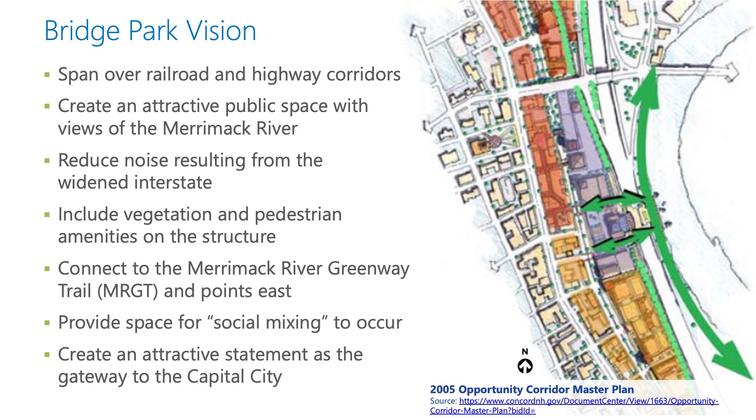Create an attractive statement as the gateway to the capital city. Whatever we do here would be visible. You've got, whatever it is, 100,000 vehicles going through here on a weekend, and all of a sudden they're going to look up and see something interesting instead of just the highway.

We considered opportunities, enhancing the visual connectivity to the river from the downtown side. This is actually an image from the Opportunity Corridor Master Plan from way back. It showed high-end development on the city side, a span over the railroad and the highway. This one didn't go across the river, it landed on the bank of the river, but similar kind of an idea.

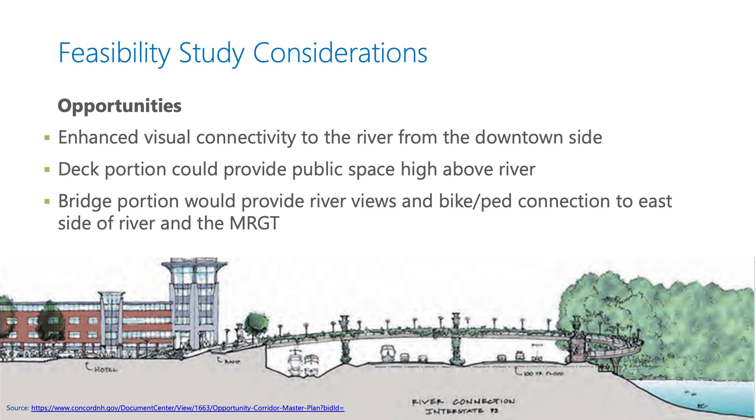Another opportunity is to provide space on the deck high above the river that would give views out onto the river. And then the bridge portion would provide river views and a bike ped connection between one side and the other.

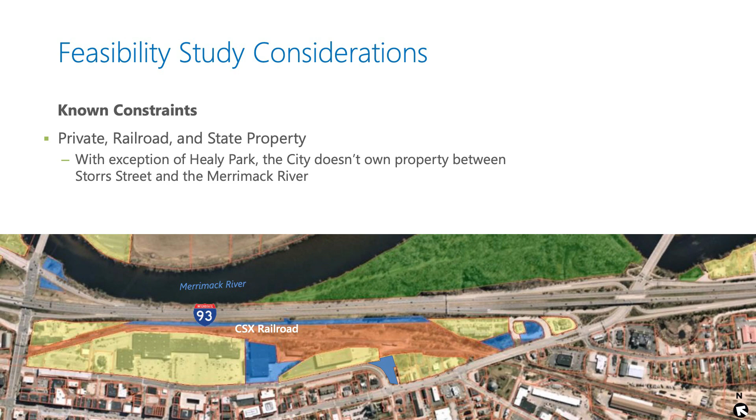The green over here is city property, the park. But so early on in the process, we met with property owners, the primary property owners, and we were, I'd say, afraid at the beginning on how we would be received. Surprisingly, it was a warm welcome. The property owners saw this as an opportunity to bring maybe some more life to their businesses. Some of them actually have redevelopment plans that this could fit in nicely with. So we went into it kind of skeptical, and we came out with a lot of hope.

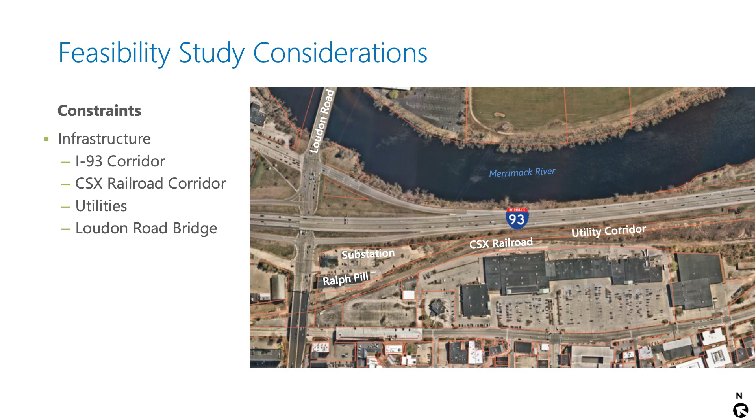There's also physical constraints, infrastructure constraints. You have the existing and the proposed I-93 that you have to get over, the CSX railroad corridor. There are some utility lines, high power utility lines that unfortunately are right at the elevation that we're going to be coming over the highway at, so we have to deal with that. And then there's also the Loudon Road Bridge, which is actually kind of an amenity.

So some of the other considerations were access. We want it to be convenient. If we just build something that people can't get to, it's not really worth it, right? So we want it to also be attractive so they will come out there. We want the connectivity, the MRGT, as we mentioned.

At the last meeting, there was a lot of discussion about what kind of amenities would go on the structure and the deck park. Everything from food vendors to a butterfly museum to, there was all kinds of ideas on what could go out there. We didn't get deep into that. We're just looking at providing a space that eventually could be programmed.

There was concern about security. Some of these structures are quite long, and people want to be able to feel safe if they're going to venture out there. So there has to be good lighting, there has to be a lot of use. The more people out there, the safer you feel, and probably security systems.

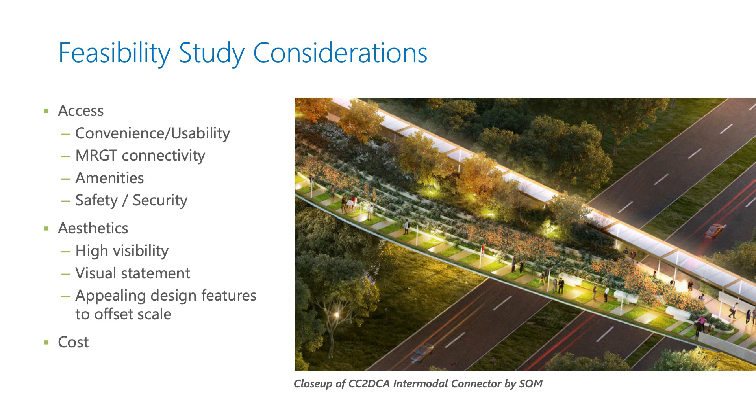Aesthetics was a high consideration. It's going to be so visible to the people in the city as well as all these people passing through. A rudimentary bridge wasn't going to cut it, so that's why we have this architect on board. We want to make a statement. And of course, cost is a huge consideration.

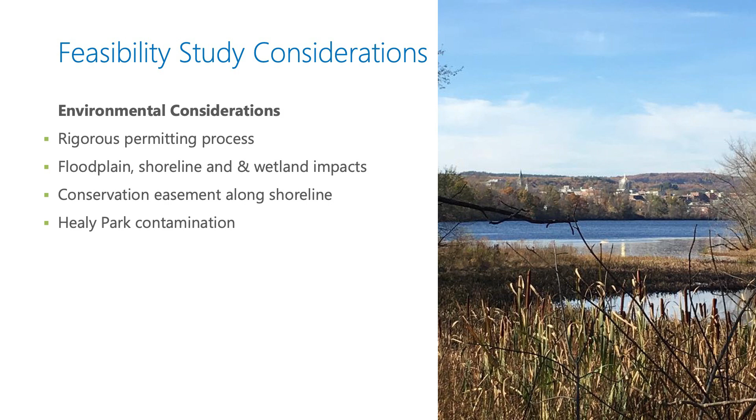There's also environmental considerations. It would definitely take a rigorous permitting process, doing work in the river. We cannot span the whole river, there's going to have to be piers in the river. The permitting for that alone would be interesting.

There's conservation easements on the east side of the river. The first 100 feet of land when you go ashore is protected. And then Healy Park, if we were to use Healy Park at all, there's concerns with some of the existing contamination there.

So, physical considerations. This is an image of a cross section starting at Main Street, and this is the plan view down here. That yellow line is where we cut the cross section through this whole area.

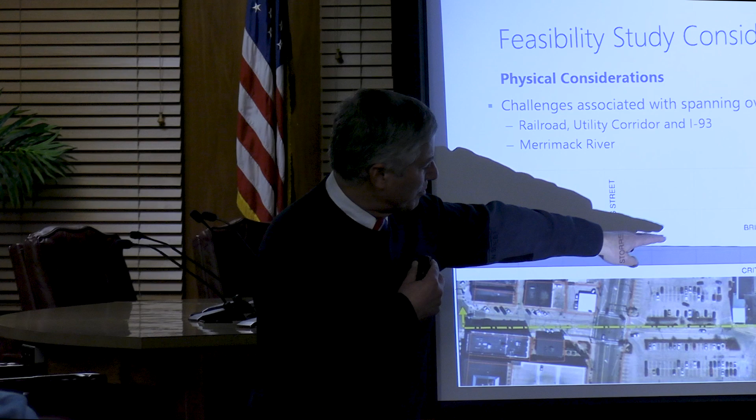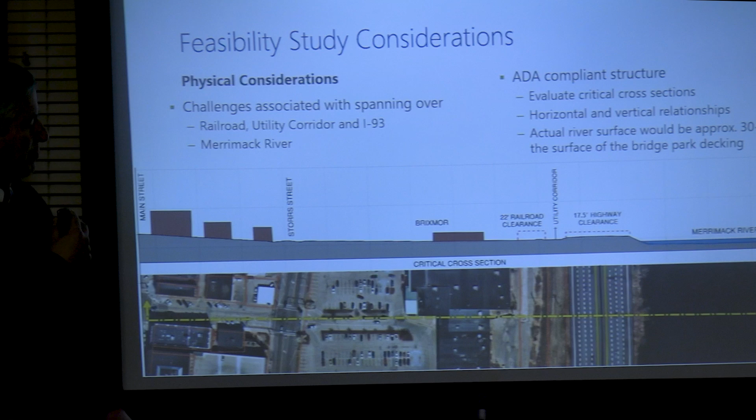So starting at Main Street, you're kind of high. You come down to Storrs Street, and you've got the Brixmor development, the plaza. You need to be 22 feet over the railroad with any structure. You get that utility line right there, and then you have to be 17 and a half feet over the highway. And then you need to get over across the river. So there's a lot of height differential here.

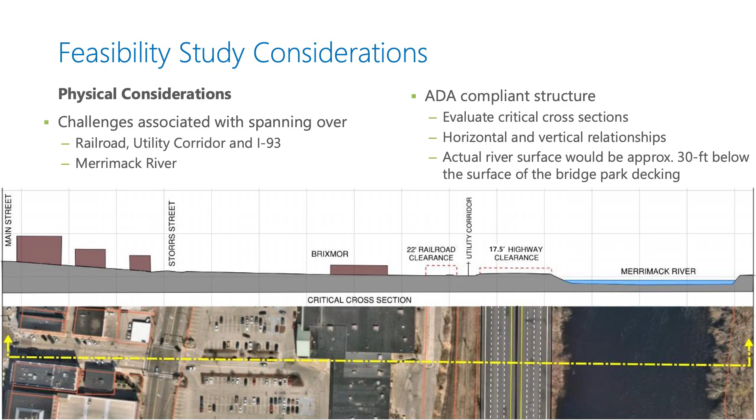If you're out here over the highway, you're actually going to have a great view because you're going to be very high, but you're not going to get down to the river.

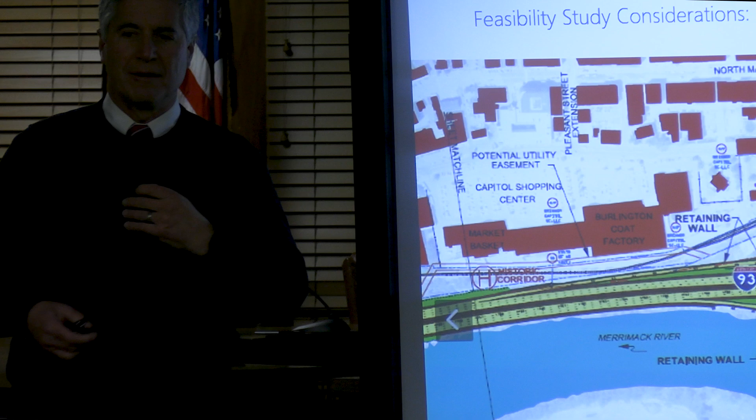I just put this up. This is one of the latest images of the 93 corridor improvements. We're looking at coming from Storrs somewhere across the highway. And we spent a fair amount of time evaluating different locations to cross, looking at elevation, looking at property ownership, looking at trying to keep it as short as possible for cost. And then Steph can talk about the alternatives.

Okay, so we considered 3 different alternatives. The first alternative is a multi-use bridge spanning over the railroad, I-93, and the river. And we had 2 sub-alternatives as part of that effort, looking at 2 different alignments.

The second alternative was taking one of those bridge alignments and then considering adding a deck park connected to it. And then the third alternative was looking at essentially depressing a section of I-93 and building an expansive park over the top of it.

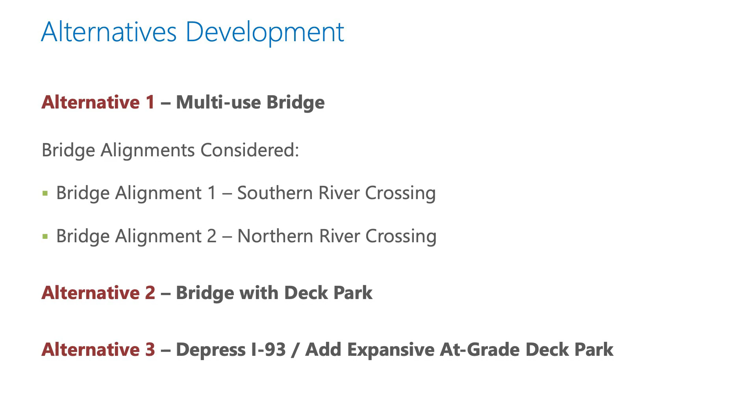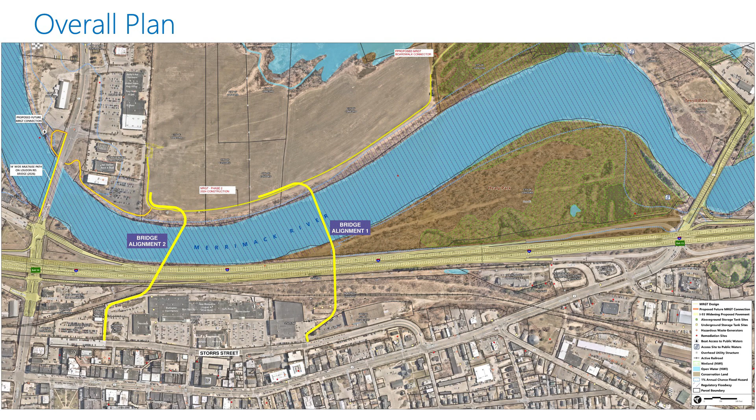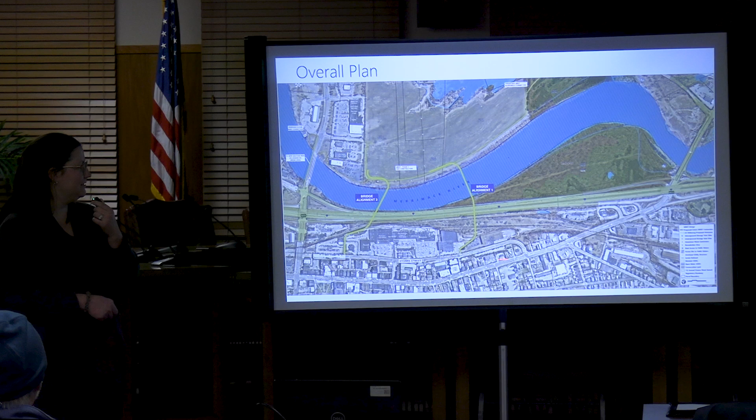This is an overall plan looking at the entire study area, which initially was the area between exit 13 to the south and exit 14 to the north. Ultimately, we concentrated our efforts in this area closer to the northern end, because there were better opportunities for connectivity to downtown through there, and because the river crossing was physically shorter, which would cut down on cost.

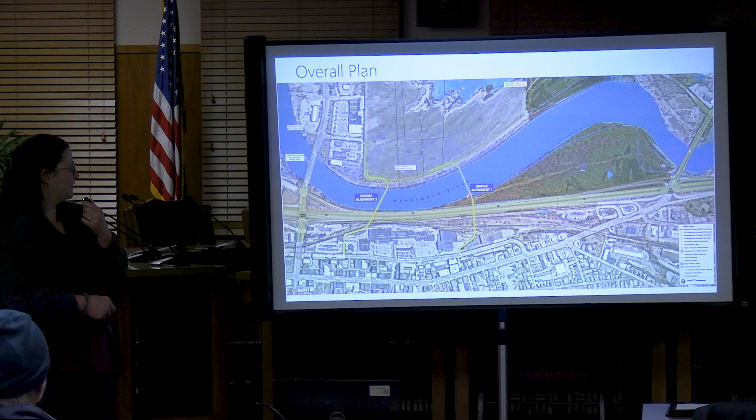Actually, if I go to the next slide, I can zoom in. So alignment 1 to the south starts here on Storrs Street. We chose this location because it connects to Theater Street, and that allows a connection to Main Street downtown. And we're south of the Brixmor Plaza. Essentially, this block of retail buildings prevents us from having anything in this area. It's just not feasible to assume that building will be going away anytime soon.

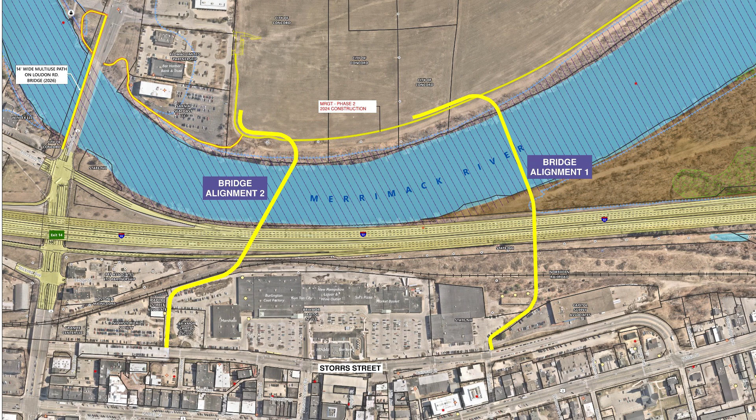Alternative 2, or alignment 2, is to the north of the plaza. It lines up with Dubois Ave, which also—it's hard to see on the graphic—there's a public alley here, which would be the connection to Main Street and downtown. This graphic also shows the connectivity to the MRGT, Merrimack River Greenway Trail right here, which is recently under construction, and it connects further to the south this direction.

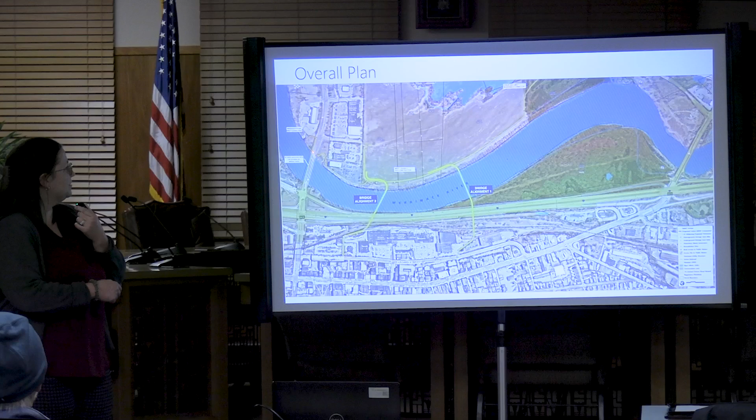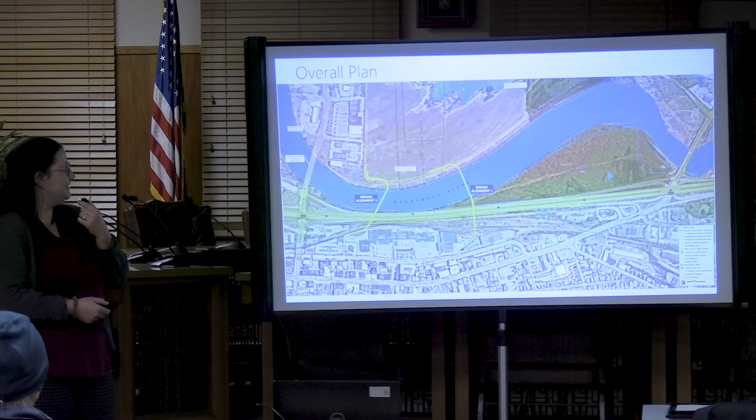Actually, if I go back, you can see the yellow line here, and this is a proposed future boardwalk connection as well that will tie in. And then to the north, this is also—Greg, correct me if I'm wrong—a future phase of the MRGT, which will connect to the planned 14-foot wide multi-use path going alongside Loudon Road. So there's a lot of connectivity in this area, a lot of options for bike and pedestrian access.

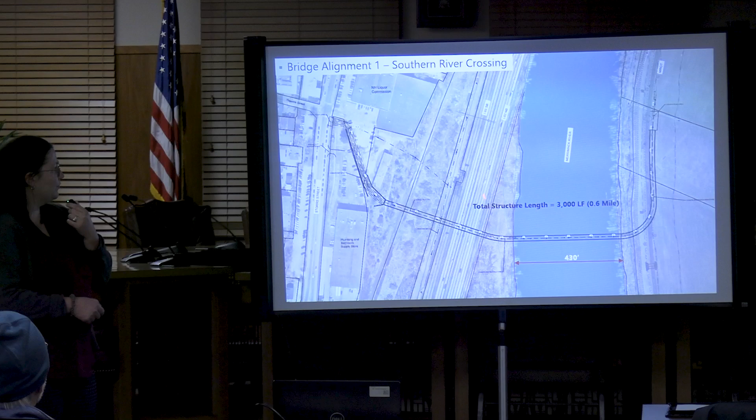Getting back to the alignments. So zooming into alignment 1, this is the one that's south of the Brixmor Plaza. The total structure length is 3,000 feet, which is just over half a mile. It's fairly long, and the river crossing alone is 430 feet.

So we turned this alignment down to the south a bit before crossing over the tracks, the highway, and the river for a number of reasons. One of which being we wanted to minimize impacts to the operations of these properties, their parking, circulation, and access. This alternative allows us to place the path in a grass strip with minimal impacts to parking. There are impacts to the driveway entrance here, but we're able to propose a revised entrance further to the south that will mitigate that.

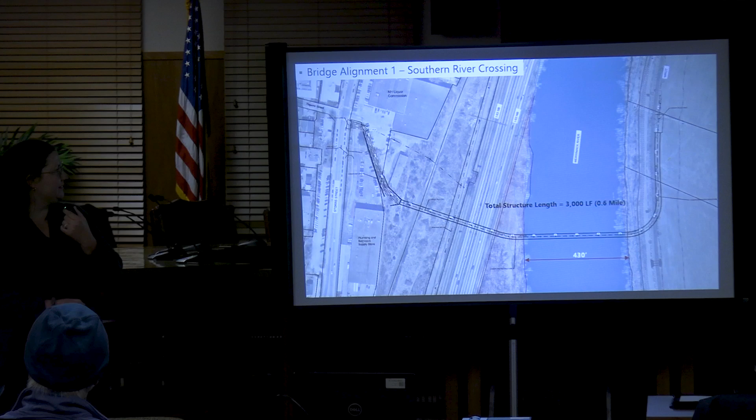Another reason—if you can see these dashed lines here and these circles, it's a little hard to see—these are existing utility poles with overhead wires. We're trying to minimize conflicts with those as much as possible. There is a line, poles, and wires running here that ultimately will have to be impacted by the project, either de-energized or placed underground. That would be evaluated if the project were to move forward.

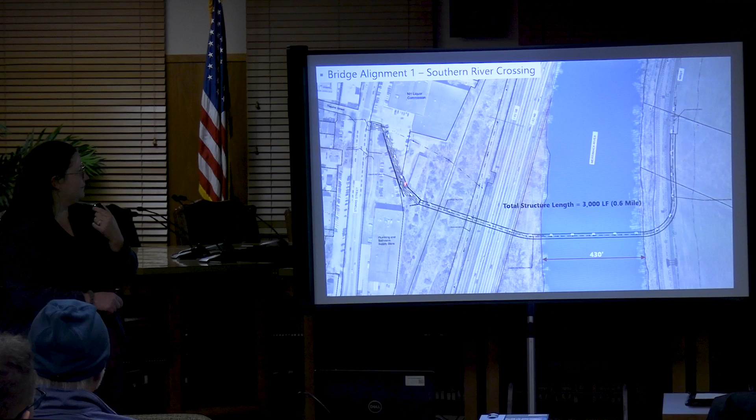And another reason is to avoid impacts to this existing building here. And then lastly, and probably most importantly, we needed enough space to ramp up to get over the different features—this is the railroad corridor, I-93, and then the river.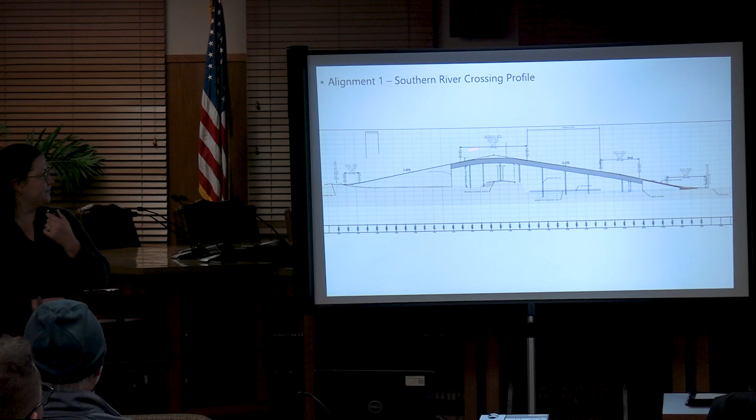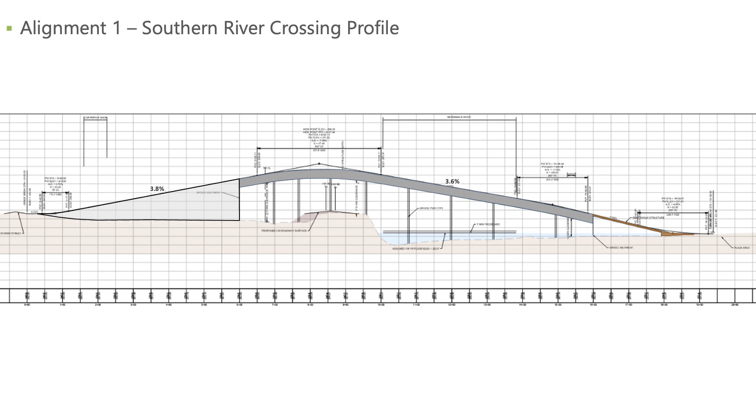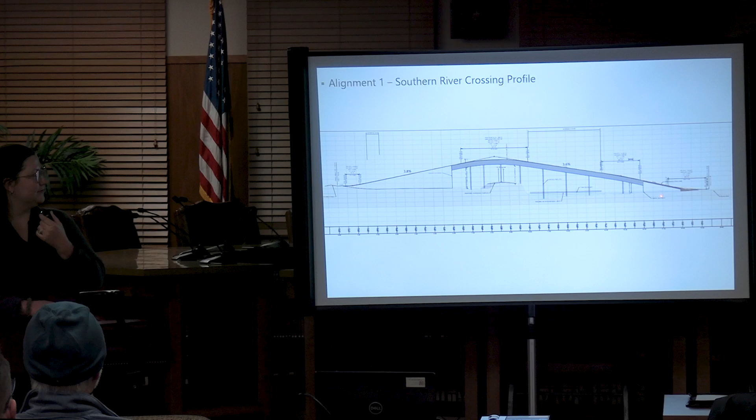The different colors on this graphic represent different structures. The light gray represents areas of fill material with some retaining walls. The dark gray represents a bridge structure with piers placed every few hundred feet or so. And the brown represents a boardwalk structure on piles. We're proposing boardwalk because this area on the eastern bank of the river is subject to flooding, and we want as limited fill in the floodplain as possible.

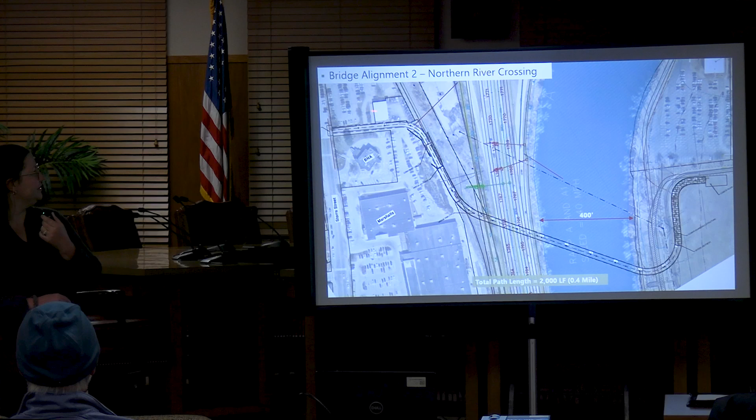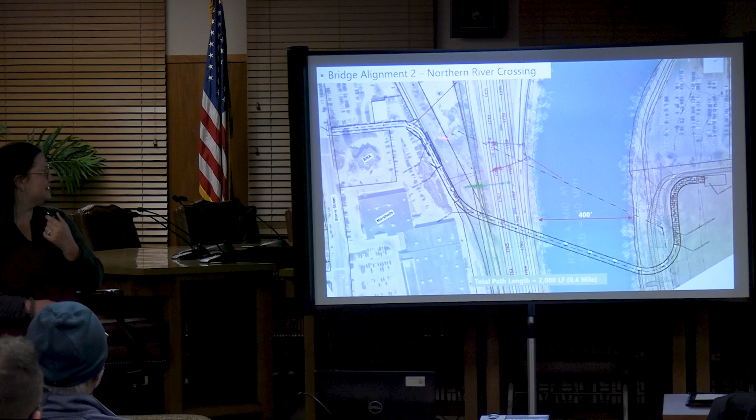Moving along, taking a closer look at alignment 2, this is just north of the Brixmor Plaza. We start just to the north of, I believe, the Bank of America building. We're utilizing a current access drive, but looking at the circulation through these properties, we think it wouldn't too negatively impact their operations. They could have new access points and work around this. If we move forward with this, there'd obviously have to be a lot of coordination with them, but it seemed like the least impactful option to operations.

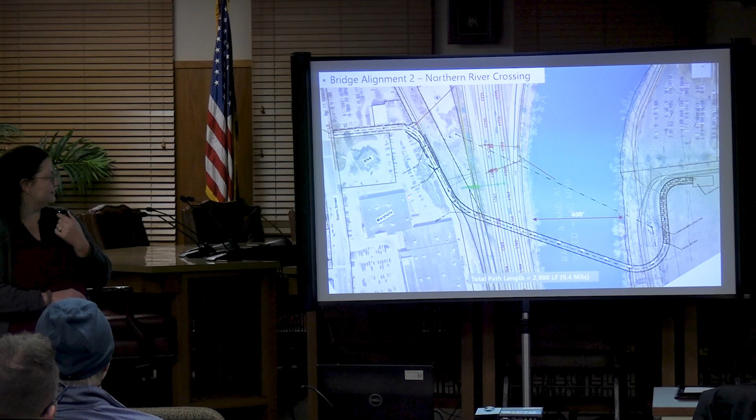And then we skirt around and hug the property line with the railroad. Again, it's impacting an access drive here, but we feel there are plenty of other options for vehicles to circulate this property. We did peel away before we got behind the building because we wanted to maintain access back here to the loading docks and for emergency vehicles.

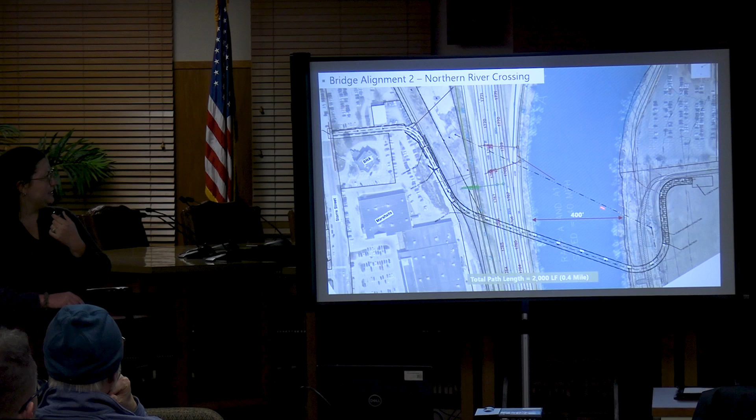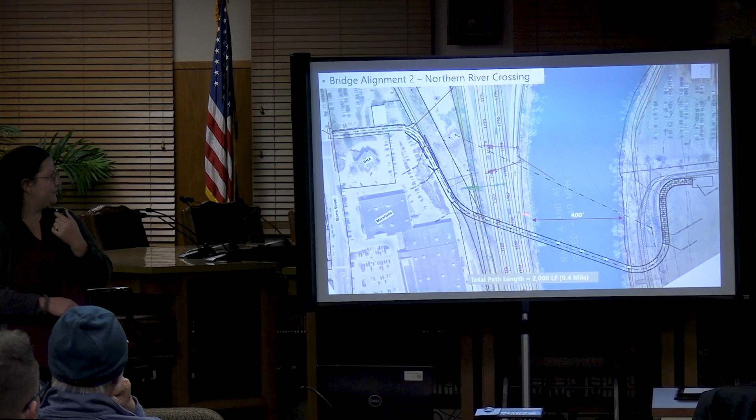We're pulling this alignment away to the south a bit too, similar to the other one, because we needed room to ramp up to get over the different features. This alignment also crosses at a skew, mainly to avoid high tension power lines here, this dash line, and right here and right here are very large utility pole structures we do not want to impact if at all possible. This alignment's total length is 2,000 feet, just under half a mile, and the river crossing in this location is 400 feet.

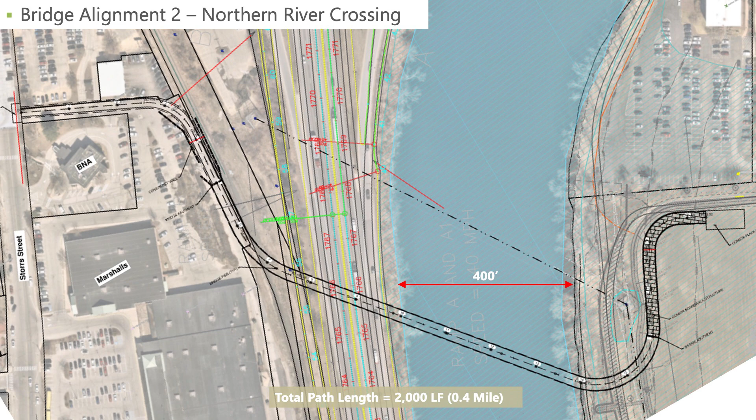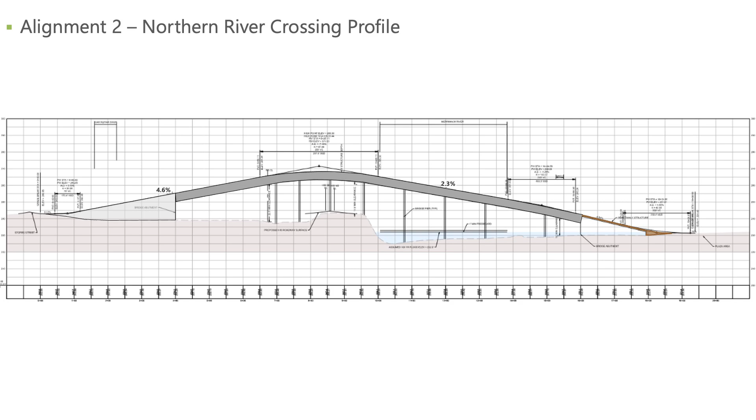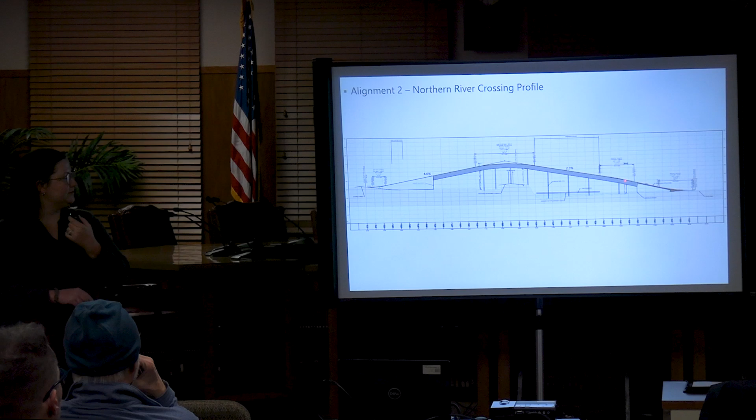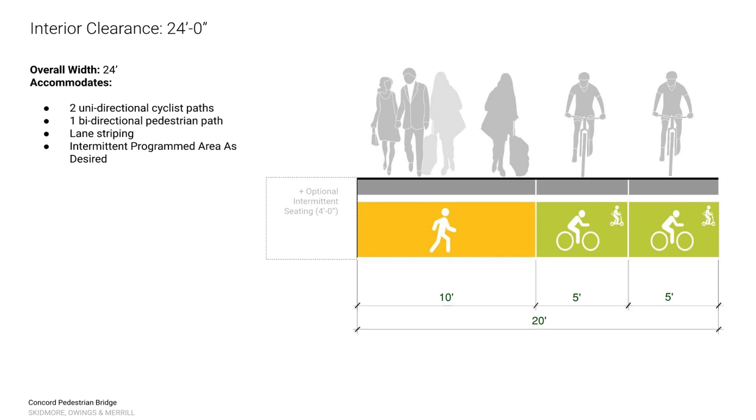This graphic depicts the typical cross-section of the pedestrian bridge, or shared use path bridge structure. The right side would be designated for cyclists, with 10 feet, 5 feet in each direction, and the left-hand side designated for pedestrians, plus an optional intermittent 4-foot wide seating area, for a total clear width of 24 feet. This is very large and wide compared to a traditional standard shared use path bridge, which is often only 10 to 14 feet if just accommodating bikes and pedestrians without amenities.

So with that, I'm going to turn it back over to Greg, and he's going to talk through some of the other efforts that went into this.

So Steph just mentioned the desired width of the structure, and part of that came out of what we heard at the first meeting. Because the bridge is so long, people were concerned about what it would feel like if it was very narrow - they likened it to a tunnel effect. So we opened it up to the 24-foot clear width, making it more usable by all users. You're going to have walkers, runners, and bicyclists on the same structure and feel comfortable.

So then we started looking at what kind of bridge, and we looked at a range of different types: steel girders, box beams, trusses. The truss is interesting - it's actually a fairly efficient structure, really reflective of a railroad type bridge, which doesn't necessarily work in this environment. It's not really what we're going for aesthetically. We all love the cable stay bridge - think of the Zakim Bridge in Boston - but think of multiples of cost, so we didn't do that.

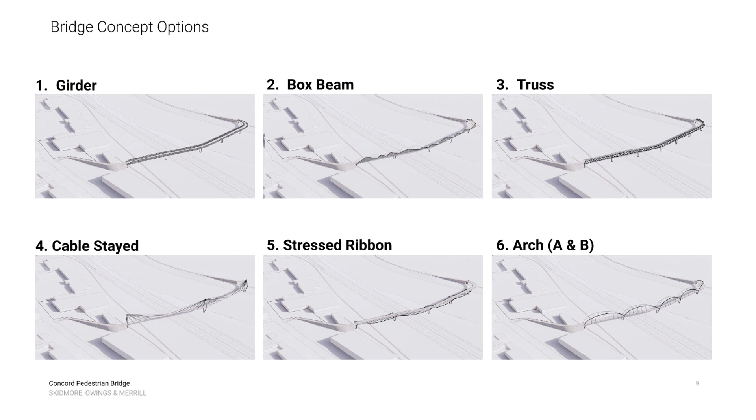Stressed ribbon, similar thing—there are very few of those around. They're really beautiful, but extremely costly to build and maintain. And then similar to the truss, you could do an arch type structure, which again was nice, but we weren't sure it was really representative of Concord in this setting.

The girder, the steel girder number one, is the most efficient from a cost perspective. So we said, well, what can we do with an efficient bridge to make it look good? But first, this is what it would look like if you just went your basic 24-foot wide steel structure. And this is what we're trying to avoid.

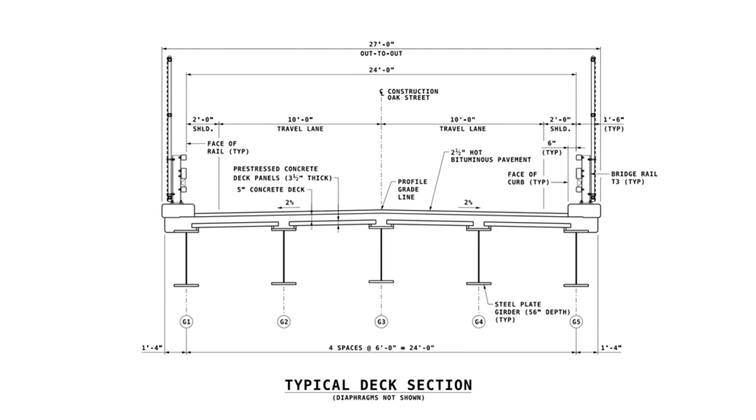High fencing over here because you're going to be over the highway—very rudimentary. So when we did our cost estimate, we started with this. We costed out what it would be, a structure like that, to cross the river and everything else.

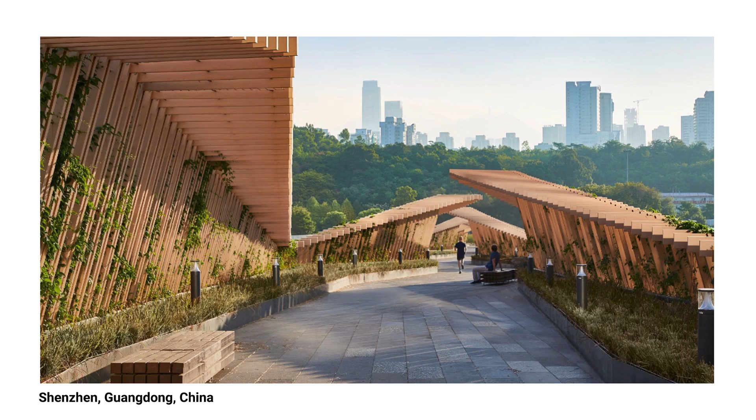And then the architects got a hold of it. And this is actually one that they designed. And we got a lot of inspiration from this. They showed us all kinds of examples they've done. And we kind of came back to something like this.

It's still a steel structure with a different railing system, basically. The railing system is the big difference. And then incorporating plantings, incorporating lighting, incorporating seat walls.

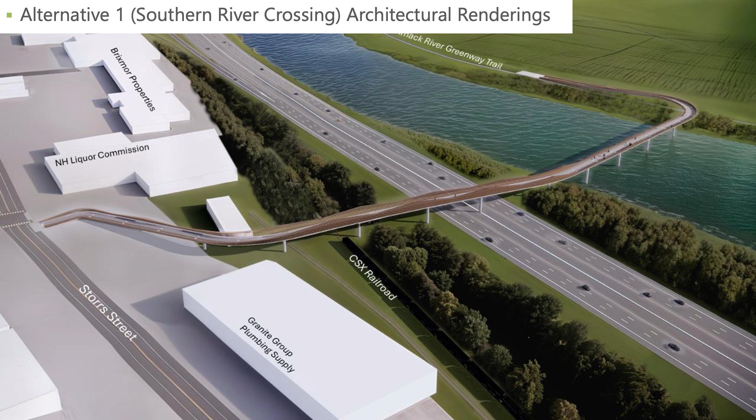So this is it. This is the first view that we're going to show you of the southern alignment. This is how it would appear from the air. And we kicked it around a lot, and then we said, you know what?

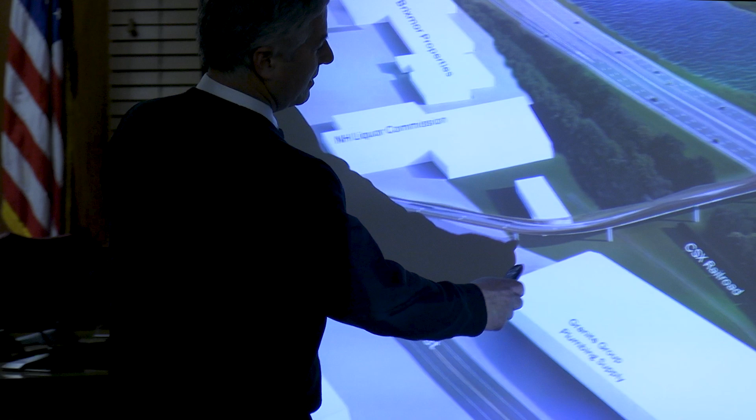How does this work in New Hampshire? Does it work here? Think about the profile of that railing looking like the gateway to the mountains. All right, it has kind of that effect.

And it's high over the railroad and over the highway, but then over the river, it gets down to a normal height of a railing so that you can see the river.

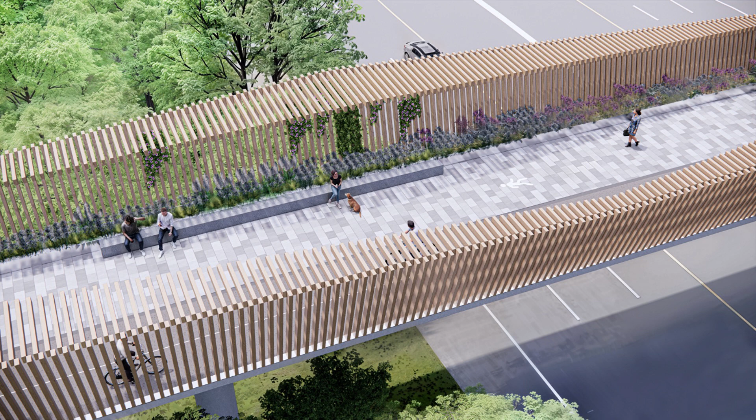Just an aerial view looking down with the highway down below. Again, that's that 24-foot width.

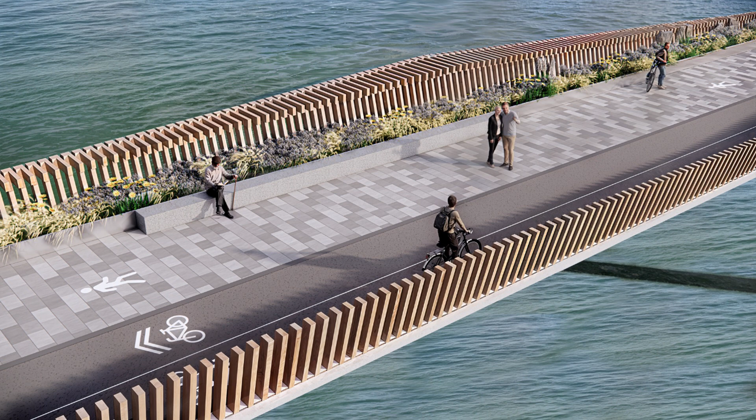This is out over the river where the railings are lower, but still with the plantings, still with the seat wall. And then the bike versus the pedestrian is obviously delineated by just the material types and the color and the striping.

This is once you're across the river, starting to go through the woods before you get into the fields.

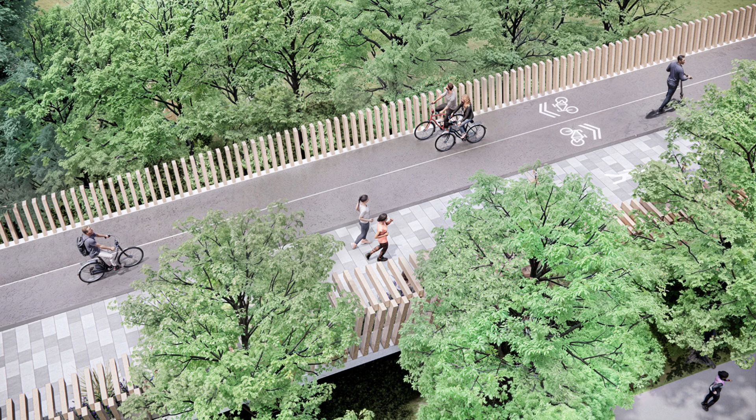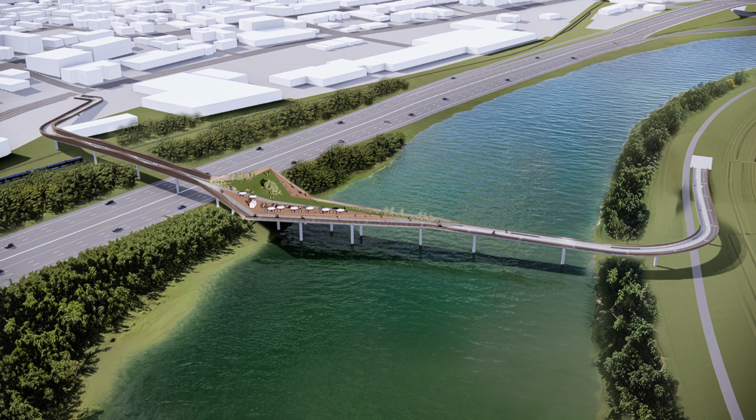So we're also charged with doing a deck, a park. So this is adding a feature to that same bridge, which is essentially a park shaped like the Starship Enterprise, but it's there you go. Representative, no, it's not representative of Concord.

So one of the differences, I think, from what people might have been expecting—I think people at the first meeting were saying, put the deck over the highway, cover the highway. But we said, well, that's not really accomplishing much. It's not protecting the city from the highway. It's such a small space.

It's going to be noisy for the users of the park. We really want to get people in touch with the river, so let's move it out. It's really a similar cost. It eliminates some of the concerns of having this over the highway from a maintenance and other perspective. And it gets people out on the river.

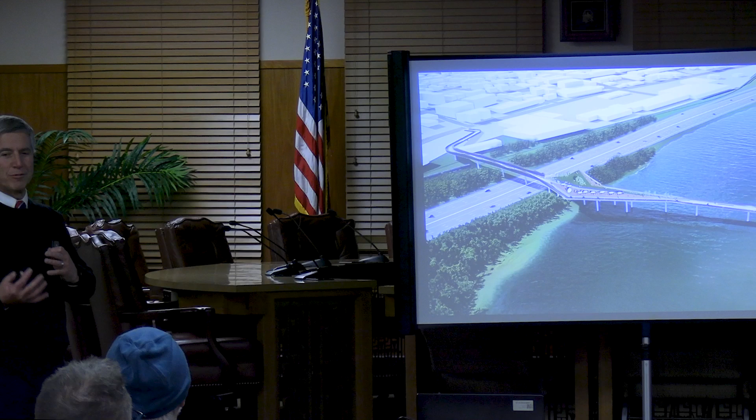And I kind of like the way that the shape, like this wall or this edge here, faces people out up that direction of the river, and then this one faces them downstream. So we thought the design was innovative. It can take any shape, but instead of just putting a square over a highway, they took it out over the river. And this southern alignment takes advantage of where the stream bank actually starts to get kind of wide.

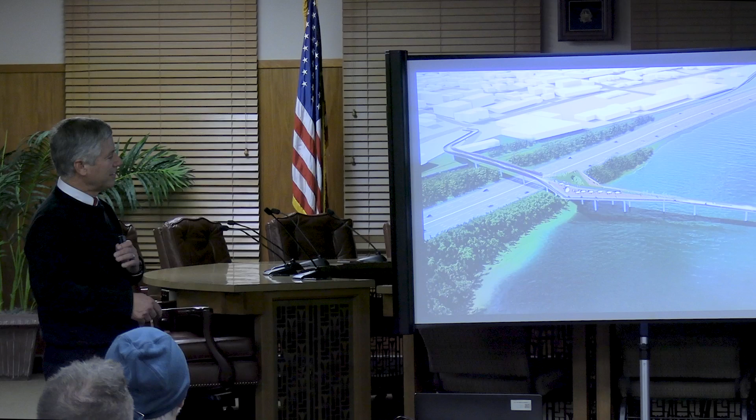So it's not all over water. It's not at all over the highway. It's taking advantage of some of the land that's right there.

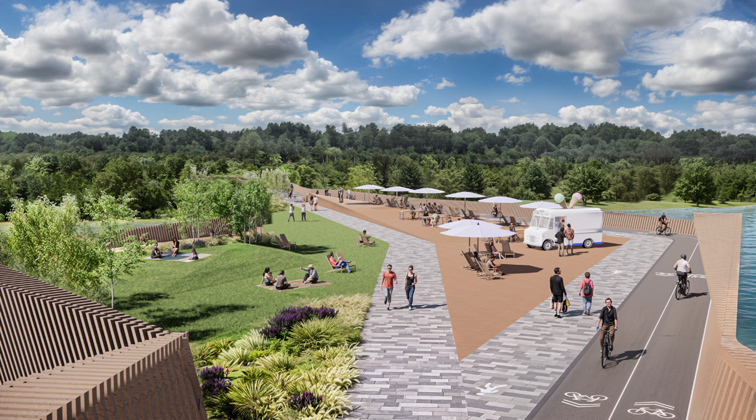So some ideas of what it could look like on top, this is facing east, looking from the high point on the bridge out towards the river. Because the trail goes down as you go out over the river, they left part of a deck that's level up here, so people standing here would have a really great view over the railings because they're higher. It'd probably be a little safety rail, but anyway, you get the idea.

That brown area would be level, and the trail itself has to start diving down towards the other side of the river. They took a guess at what kind of programming would be out there, but that's to be determined. Would it be lawn space or something else? Who knows?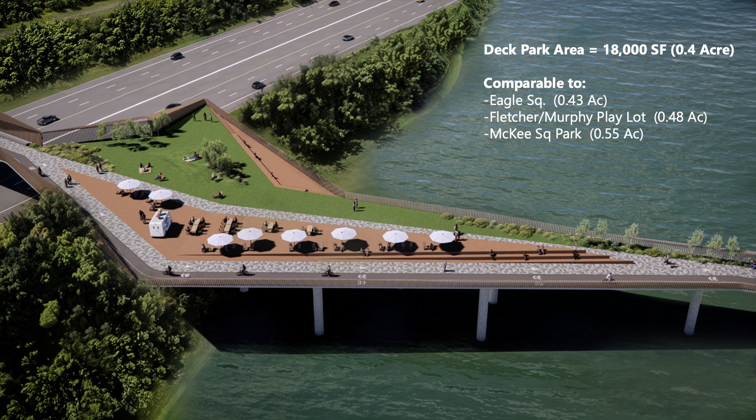This is looking down on it a little closer, and we estimated the area to be about 0.4 acres. Beth gave me some facts about similar parks in the city for reference: Eagle Square at 0.43, Fletcher/Murphy Play Lot at 0.48, and McKee Square Park in the middle of McKee Square is 0.55, just for reference.

This again is looking towards the east as the path is descending, but the deck is staying high.

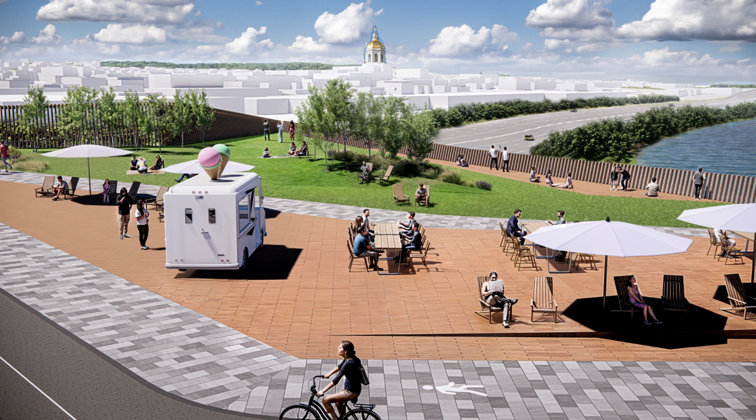Another view, they created this city model using real city blocks and buildings. They wanted to make sure we understood where the State House is in relation to it, and how there would actually be a view of the State House. I think that's a little exaggerated, but it's right there.

So the other alternative we were asked to look at from the last meeting was covering the highway, depressing it, sort of like what was done in Boston with the Rose Kennedy Park. We did that, going from Loudon Road to the south, about as far as was practical, because you have to start coming out and going up to exit 13 to the south. This would have to be totally flipped, where the highway goes under Loudon Road and Loudon Road comes over. We had to deal with the ramps on both sides, and developed a profile of what that deck would look like.

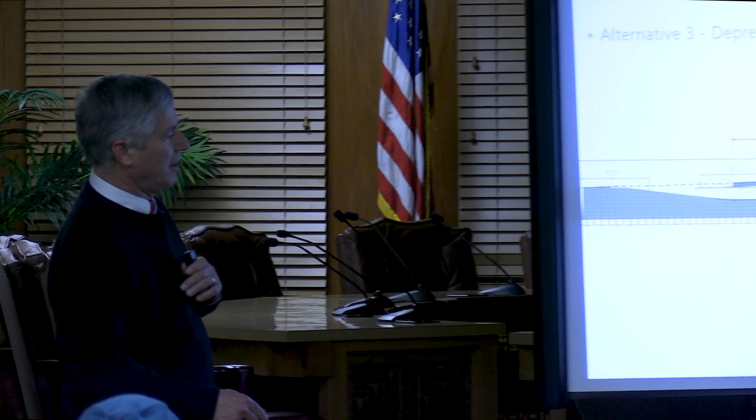So the deck itself is the green. The dashed line up here is the existing ground today. This is the profile down here of the highway that would have to get underneath. An important feature here is that blue line, that's the 100-year flood elevation.

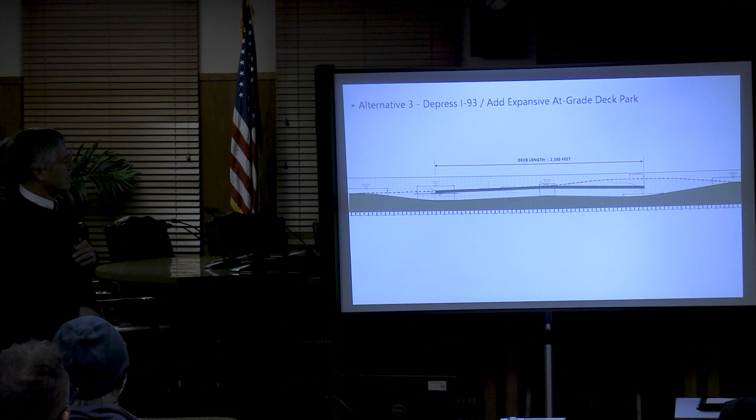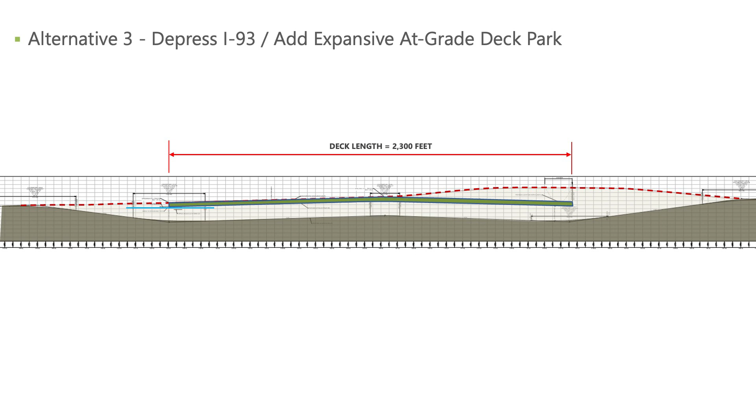This would be in what they call a boat section, so it would not be exposed to the flood. However, we did meet with New Hampshire DOT, and that was a non-starter. They did not want to see their road below the flood elevation, for good reason.

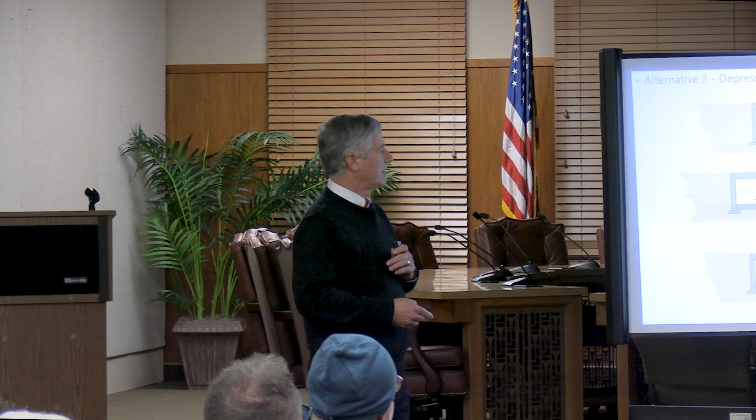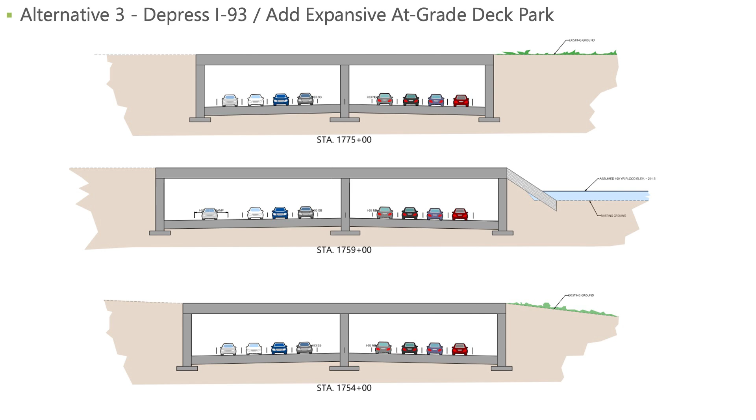We cut some cross sections through that area to show what it would have to look like. These are cut at different locations along the deck. This one in particular shows where the river is in relation to the structure, and shows the correct number of lanes through here for the widened 93. It's a big structure, a lot of work.

This would be hard to build even if it was in the middle of Kansas, but you have an existing highway that's there in the way, so staging something like this would be extremely difficult.

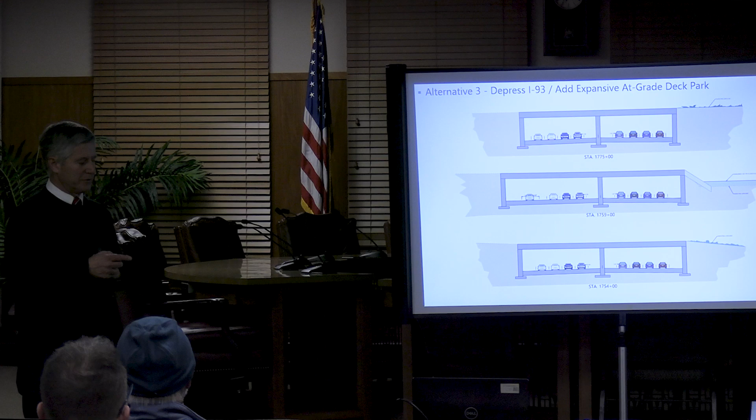And then the costs. Our senior bridge engineer took a deep dive on how to estimate the cost for these structures, comparing to other structures around the country by square foot costs, linear foot costs, the type of river construction. He came back with square foot costs to build just the bridge, not the deck park. Adding the approaches, the raw cost is about $46 million.

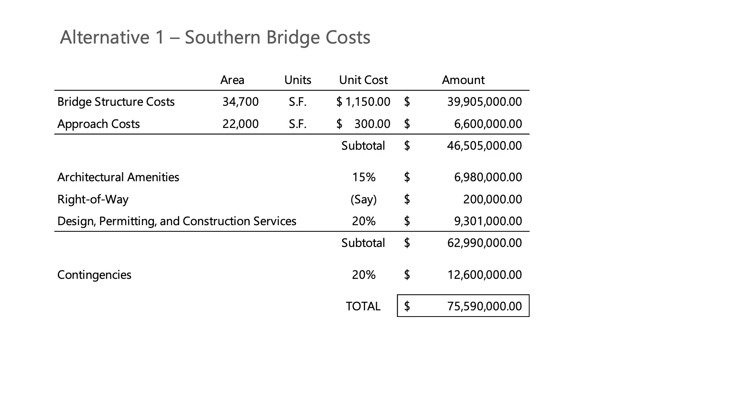If we start adding architectural amenities, we're at least another $7 million. There's going to be right-of-way costs, crossing the railroad and private property, that's probably low. Then design permitting, construction phase administration, and a subtotal of 62 million, adding 20% for good measure. We didn't even add escalation because we don't know how many years out this is. We're at 75 million for that southern bridge structure with architectural amenities, no deck park.

Adding the deck park up in here using similar unit costs brings the raw cost to 68 million. Adding architectural amenities to the bridge, the bottom line is 114, call it 115 million.

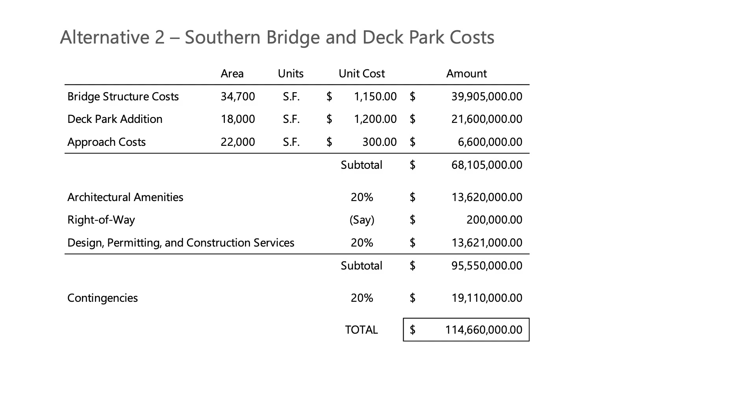So just to put it in perspective, we didn't even price this option. Where it was a non-starter with DOT, we knew it would be many multiples of the other structures, so we didn't even take a shot at it.

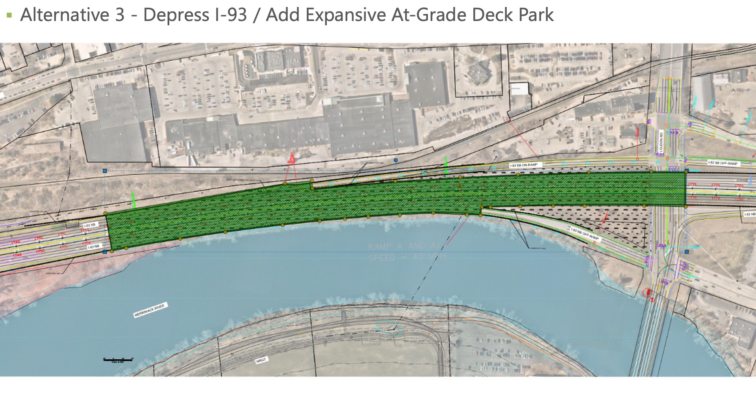I will say this probably is the greatest solution. There's a lot of benefits, right? Huge space, you're hiding the highway for a big piece of it, depressing noise. You have a decent edge along the river. You're not really connecting to it, but you can see it a lot better. You're not 30 feet up. So there are a lot of pros, it's just daunting, and it's a non-starter.

So our next steps are to make a similar presentation to City Council, summarize our findings in our report. But before we do that, we want to hear your input. So I'm happy to go back to any slides if you have any questions.

Do you have an artist's conception of the cable stay bridge? We did not do a really detailed one. We did look early on at the costs of a cable stay with the kind of spans we're talking about, and it's significantly higher. Cable stay bridges also have a very high long-time maintenance cost, the cables have to be inspected annually or whatever. But we did not do a rendering of it. There are a number of other ones around that we looked at.

Are the Loudon Road improvements for bike paths going to happen regardless? Yes, they are going to happen, they're not connected to this. I think they're 2 to 3 years out, and they're happening. Again, it's a 14-foot wide multi-use path.

Have you checked with the rowing club lately? Do they like having a bridge across the river? I haven't heard from them. Funny, because we know some of them, but haven't heard that.

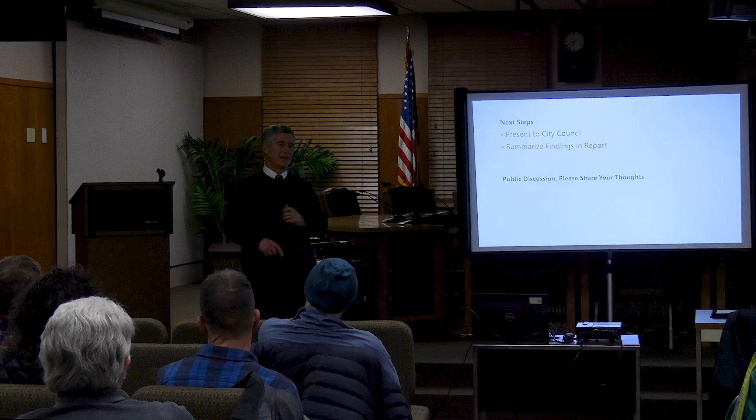Yeah, I think there's going to be a lot of bicyclists and walkers and runners, particularly runners, making this connection. I can see some really good loops forming, especially once we get the money to build the boardwalk and the rest of the MRGT. I think all this will be really great.

How do you see winter maintenance on that bridge? It's a concern, you'll have to be out there maintaining at least the pathway. And then that begs the question, how much use will it get in the winter, right? But at least it's wide enough to get a truck on there. We did size it for vehicular passage, for maintenance, for emergency services, for ice cream trucks.

But then the question is, is that going to be unattractive for people to go out there on a 10-foot wide structure? Does it really accomplish what we're hoping? We want this to be, or I think you all want this to be, more than just a transportation facility. I think we want it to be somewhere where people want to spend time too. And 10 feet really doesn't do that, or 12 feet.